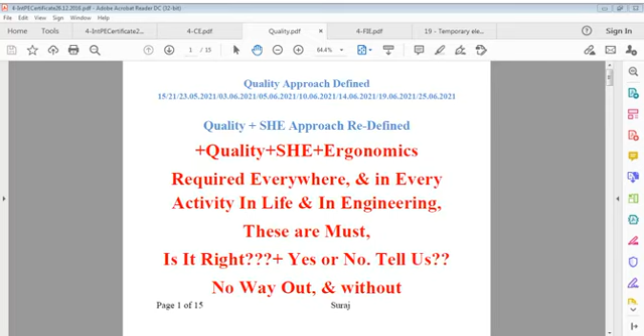The system should be that I paid you and you give me a good product. That is what the system is. But here the system has been changed to something else. Meaning delivery is more important, post is more important, courier is more important, the parcel is more important than what is contained in the parcel. That is the status of quality.

I can say this quality system is fake, in fact. Fake. You should mind it or don't mind it, I don't care. Quality system has become a burden on consumers if it cannot deliver a product. It is clearly stated in the system definition that this system does not guarantee quality of product. We know that. Don't tell us that the system doesn't guarantee that. We know it very well, it doesn't guarantee.

Because the system is not a manufacturer. System is not a company. System is just a few pieces of paper or a small booklet. It is nothing more than that. Certain ideas have been collected at one place in a few lines, in a few pages. Ideas of those professionals who may be engineers or management graduates, or who are only interested in creating a piece of show. If that is okay, up to that, it means they are just interested in a publicity stunt.

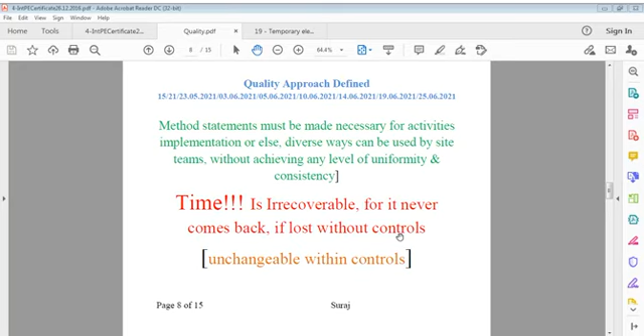requirements. I cannot produce a structure which is not going to be used, or which cannot be used just for elevation purpose. Should I do that? No. Fact remains that when I work on some structures, it remains meaningful only when it has a certain purpose. If it has no purpose, there is no meaning of investment of time, investment of money, investment, involvement, cost, risk, taking all risk. There is no meaning of that.

It's like some primary student or student of middle school takes up some drawing sheet and draws some art on that, some painting, which can be of no use except that I have done it. It looks very attractive, colorful, and teacher would grant some marks on that. That's purpose of that paint. But here I cannot paint. I have to do clear work. It's important. Painting will not suffice.

It's like makeup. If you think you're not very handsome or beautiful, you want to hide your errors, or you can say awkward faces, and you apply makeup on that. But that makeup is instant only, you spend only a couple of minutes or hours, and after that you wear it out.

Real face comes up, and real face comes up with further scratches or further stains on that. That real face is engineering, what you are, how you are. When you construct some structure, you find that it is not very beautiful in looking when you construct it.

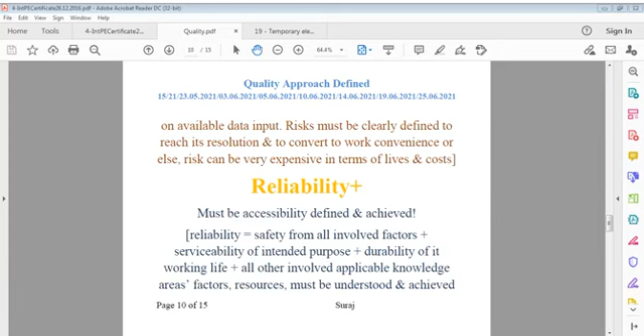This is main point, I would say, is very important from viewpoint of quality, because engineering is vast. Engineering is vast, and it may be whatever branch of engineering, all are vast. We must realize this fact also.

I'm not happy that why people are not interested in quality. I have no answer to that. How can you say that people are not interested? Everybody should be and must be interested in quality, but there may be some confinement, some obstruction to what is expected from viewpoint of quality, and those obstructions and those attractions, those problems maybe are out of control of that individual who is just an employee or manager or engineer in certain organization. Could be that that person is unable to help self, or there is some other reason that people do not bother.

You do not deliver quality does not mean that you did not spend money on that production, on that product manufacturing. Quality-less product could be, but cost remains same.

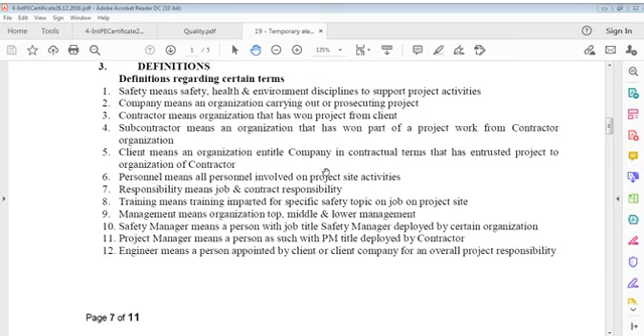When we talk of safety, we talk of a lot. This is temporary electrical supply. I talked a lot about this - I don't know how much we covered. We talked something about responsibility and that. So let us recap what I talked about - this very important point of electrical safety, because this is temporary electricals, which is also very very important.

And after that we can continue, because yesterday there was a problem of electrical supply, and also my internet did not work very well. Let us hope that it works today - I can't answer at this moment, but let us hope it would work.

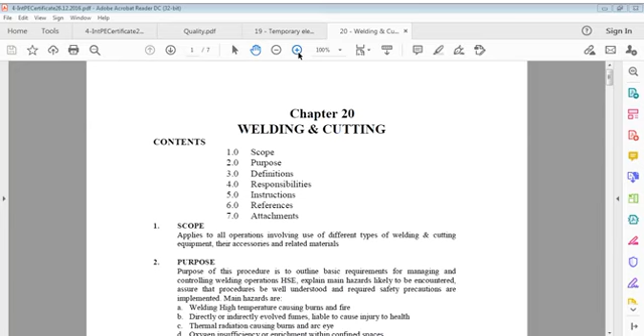In these procedures of safety, as I say, electrical supply - also there is electrical supply in welding and cutting. Let us see this also. Welding and cutting is about 7 pages. Let us move on to this and see how it's done. So we'll talk of this first.

Temporary, we have to get temporary supply for everybody on sites or wherever there is no permanent supply, on projects particularly. Generally in all projects, very limited sites get supply from state or from electrical distribution. If it's available, it's fine, you can have it. Otherwise, even if you take supply from them, that supply shall come to your main board, your transformer, or your main panel, and after that you are responsible. That main panel may be housed on a board, a temporary board, or maybe on some temporary wall.

After that, it's your job to use that electrical energy on your site work. On construction sites—I'm calling them construction sites because in factories lights are not temporary, and industries do not require temporary lights because they are established manufacturing units—we can't say that supply is temporary there, that's a permanent one. Temporary is for temporary work, like construction, which is a temporary stage. Whole constructions are temporary because projects are temporary until they are converted to operational units.

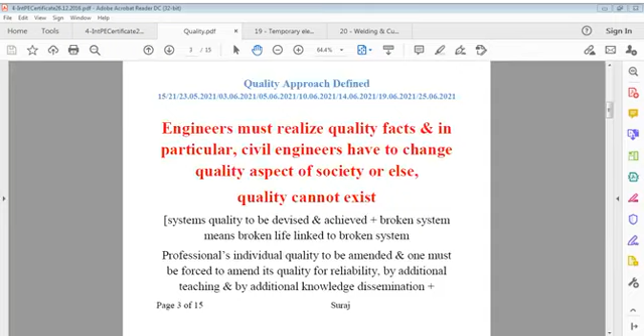So I say a regular site electrical management is required under direct controls of the electrical department on the project site. Electrical supplies to site for works is really a critical activity, since it cannot be provided in the style of permanent works. Routes of front work cable shall be required to be altered.

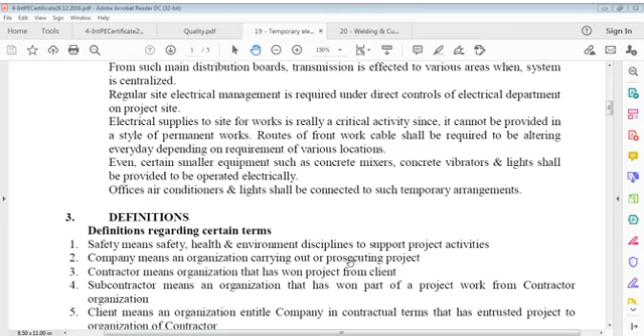Electrical supplies to site for works is really a critical activity since it cannot be provided in a style of permanent works. The routes of front work cable shall be required to be altered every day depending on requirements of various locations. Even certain smaller equipment such as concrete mixers, concrete vibrators and lights shall be operated electrically. Office air conditioners and lights shall be connected to such temporary arrangements.

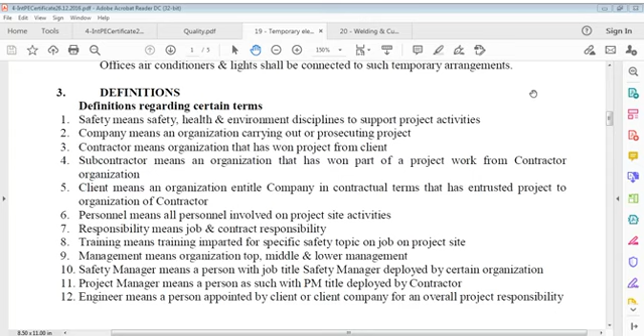Now we have certain definitions which sometimes I explain, sometimes not. This is safety - that's safety, health, and environment. Company - you know what is contractor, subcontractor, client, personnel means, and all that. Training means, of course, everyone - management, safety, all these are very common.

Employer, contractor, temporary electric is here - means temporary electric is all site temporary power supply and distribution systems, electric power tools, equipment and lighting not incorporated into permanent ones.

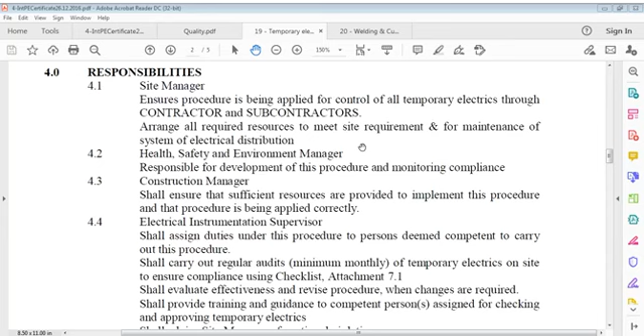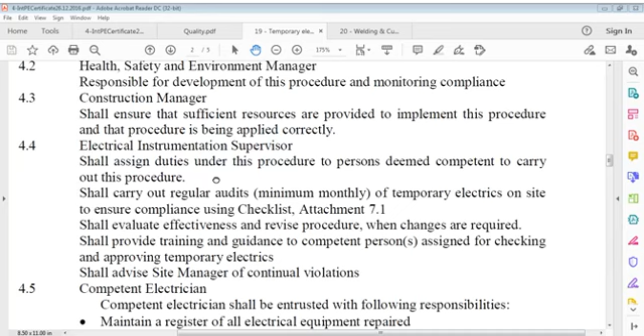Construction manager ensures that sufficient resources are provided to implement this procedure, and that the procedure is being applied correctly.

Electrical instrumentation supervisor assigns duties under procedure to persons deemed competent to carry out this procedure. Shall carry out regular audits, monthly minimum or more - maybe 15 days - of temporary electrics on site to ensure compliance using checklist or whatever attachment is there.

Shall evaluate effectiveness and revise procedure when changes are required - meaning if there is some requirement of change, you have to revise procedure - and provide training and guidance to competent persons assigned for checking and approving temporary electrics. Advise site manager or site leader of continual violations.

Competent electricians - what actually are electricians? Main technologists, you can say persons involved in running temporary electrical supply technology practically. Competent electrical person or electricians shall be entrusted with responsibilities.

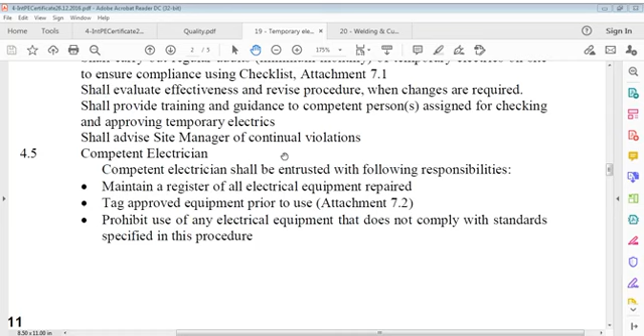What responsibilities? Maintain a register of all electrical equipment repaired. Tag approved equipment prior to use. Prohibit use of any electrical equipment that does not comply with standards specified in this procedure. Carry out random inspections of existing certified equipment to ensure that integrity of system is being maintained.

Means just act random, inspect. Though you can inspect everything, there's no bar, but in random, just for making sure it's running, system is running. Report back to E&I supervisor on certain concerns noted.

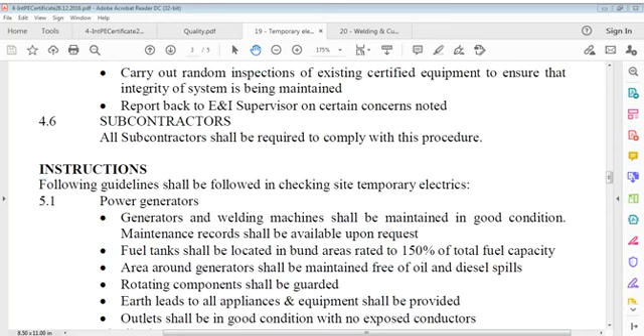Then subcontractor - all subcontractors shall be required to comply with this procedure. Very, very simple procedure, nothing very complicated in this procedure. Then instructions - instructions means guidelines. These given guidelines be followed in checking site temporary electricals, power generators, distribution.

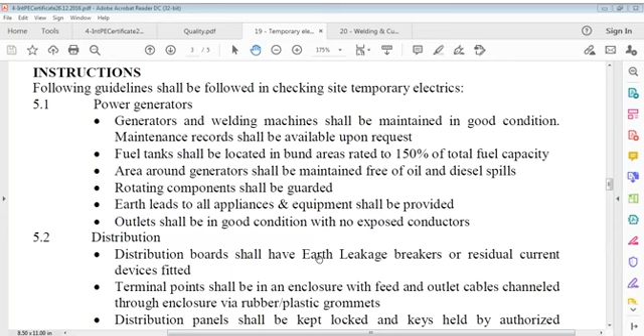This is power generators. Generators and welding machines shall be maintained in good condition. Maintenance records be available upon request. Fuel tanks shall be located in bund areas, means embankment areas, rated to 150% of total fuel capacity. Area around generators shall be maintained free of oil and diesel spills. Rotating components shall be guarded.

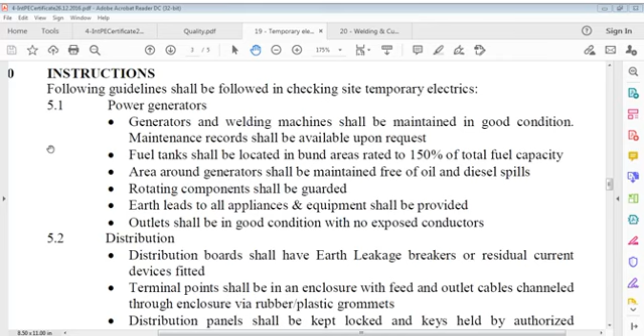Rotating components like grinder or electric saw or whatever else should have guards - call it shall be guarded. Earth leads to all appliances and equipment shall be provided - earth leads must. Outlets shall be in good condition with no exposed conductors.

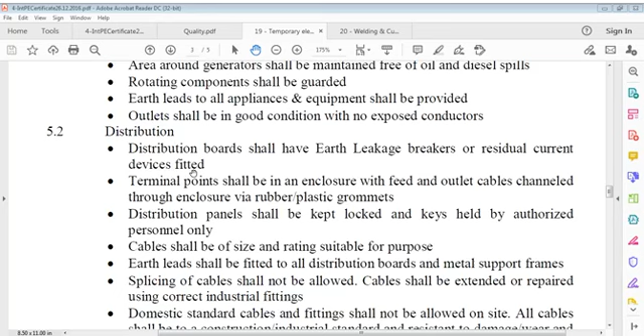Distribution - distribution boards shall have earth leakage breakers, ELCBs, or residual current devices fitted. Terminal points shall be in an enclosure with feed and outlet cables channeled through enclosure via rubber plastic grommets.

Distribution panels be kept locked and keys held by authorized personnel only. Cables shall be of size and rating suitable for purpose. Earth leads shall be fitted to all distribution boards and metal support frames.

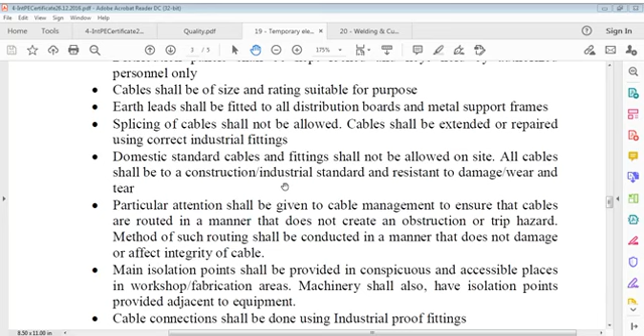Particular attention shall be given to cable management organization to ensure that cables are routed in a manner that does not create any obstruction or trip hazard. Method of such routing shall be conducted in a manner that does not damage or affect the integrity of the cable.

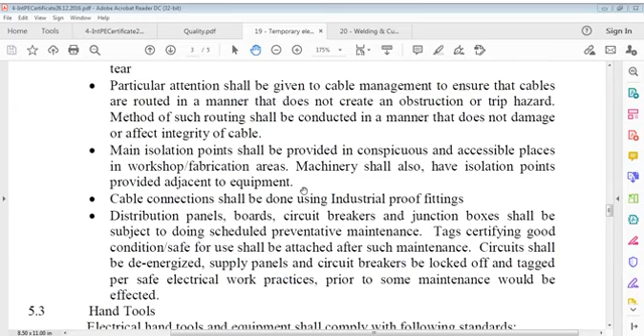Main isolation points shall be provided in conspicuous and accessible places in workshop and fabrication areas. Machinery shall also have isolation points provided adjacent to equipment.

Cable connections shall be done using industrial proof fittings. Distribution panels, boards, circuit breakers, and junction boxes shall be subject to scheduled preventive maintenance. Tags certifying good condition, safe for use, shall be attached after such maintenance. Circuits shall be de-energized, supply panels and circuit breakers locked off and tagged per safe electrical work practices prior to maintenance being effected.

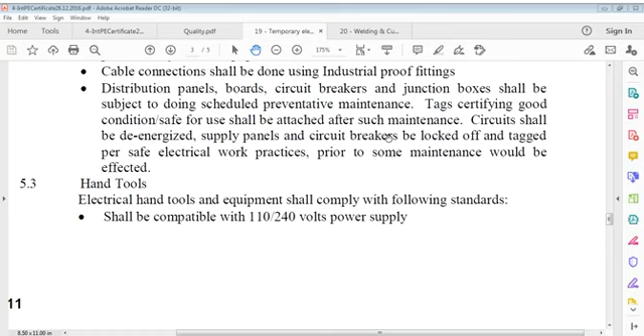Hand tools, electrical hand tools and equipment shall comply with the following standards: shall be compatible with 110 to 240 volts power supply. Should occasion arise where 240 volts requires to be used, such tools shall be double insulated. Equipment casing shall be intact, with no loose fittings or exposed cables. Plugs fitted shall be of an approved industrial type. Condition shall be good and the tool subject to preventive maintenance routines.

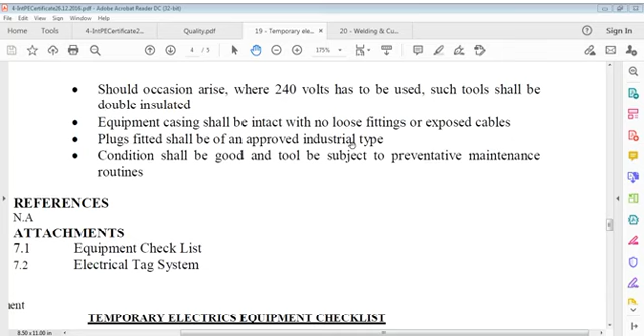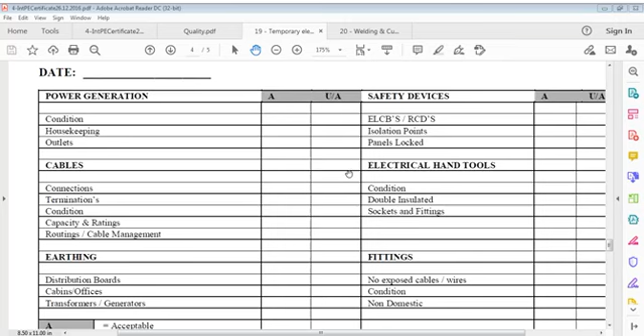Equipment checklist, electrical tag system - temporary electric equipment checklist. We have to write the area, and different conditions: power generation, housekeeping and outlets, safety devices like ELCBs, circuit breakers, RCDs, then cables, connections, terminations. These are various points - power generation, cables, earthing, electrical hand tools, fittings - few points that are better to understand.

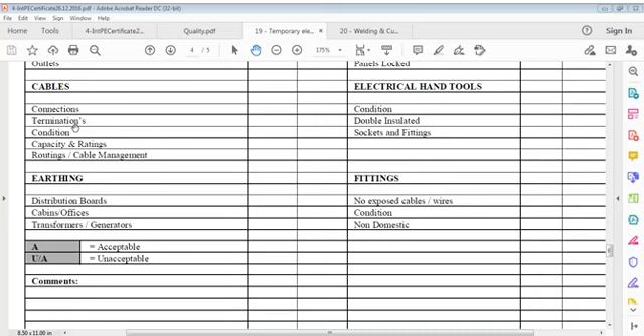In cables we have connections - important - cable connections, cable terminations, cable condition, cable capacity and ratings, cable routing, cable management. We have to check these and write them down. For power generation, we have to see condition, housekeeping, and outlets - what is the condition of power generation, what is the housekeeping, what about the outlets.

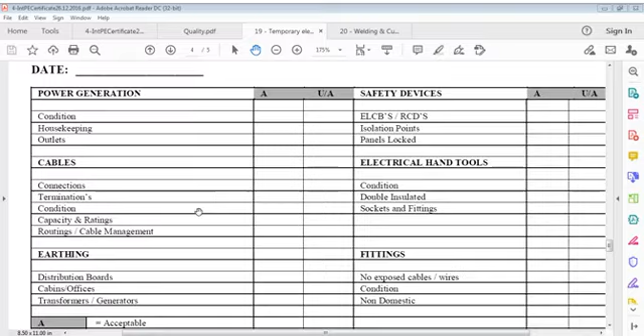Then we go to cables. Cable connections are required, cable terminations are required, what are the conditions there for cabling, capacity and rating of cable - that's more important - armored cable or whatever capacity it is, what's the rating, what's the route, that's organization, how to use it safely. Then earthing - distribution boards, connections, earthing, cabins and offices, transformers, generators. We mark A for acceptable, or UA for not acceptable.

This is like a survey - the temporary electric equipment checklist. For example, earthing is here. Then safety devices - ELCBs, RCDs, isolation points, and panel lock - these are devices we have to check. Then electrical hand tools - condition of the tool, double insulated sockets and fittings, etc.

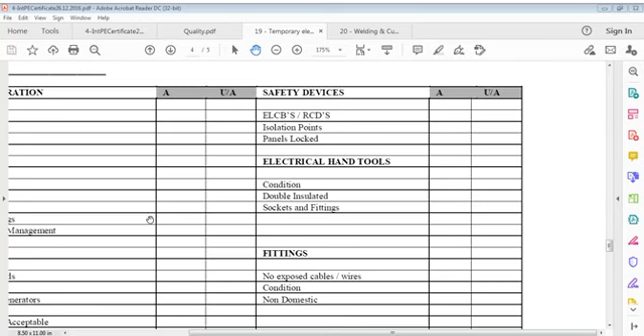So we mark A or UA - available, acceptable or unacceptable. Then fittings - no exposed cables or wires, condition non-domestic - and you have to do that practical, and equipment detail below has been checked and certified, and we write what the equipment is. Interference with this equipment shall negate this tag, and alterations required must be notified in advance to the undersigned.

That's an important point in the case of electrical supply. It's a very small page but very important one. And then we jump on.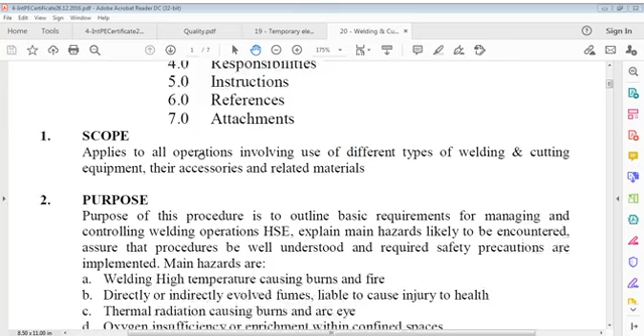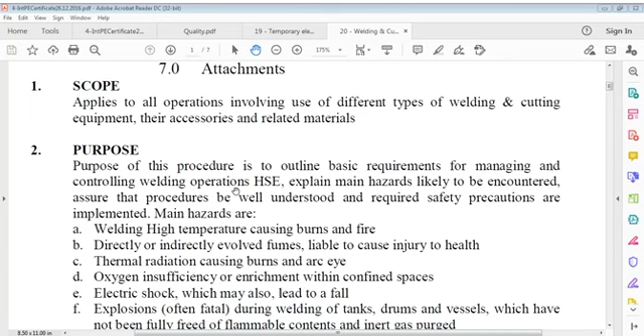Onto welding and cutting. Of course, welding and cutting, we go on to this and see how it works, and possibly if we can see electrical. Now, welding and cutting applies to all operations involving use of different types of welding and cutting equipment, accessories and related materials. And in this, what is their purpose, definitions, responsibilities, instructions. It's a very long one, almost simple.

So temporary electric supply I can just take off, and we'll go back to welding now. Let us see in addition, temporary electric supply, welding. Let us see what welding is about. Let us see. Let us see what welding is now. Let us understand what welding is.

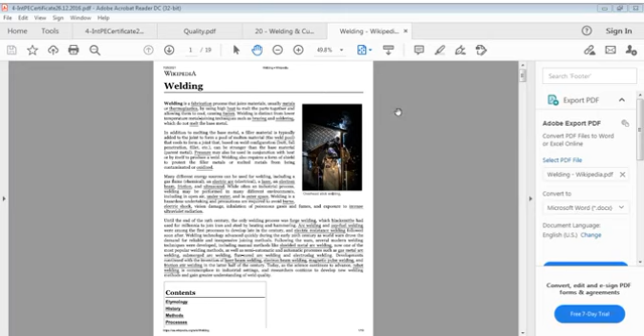Welding is a fabrication process. Let us see what it says. That's also important, I'll just take a printout of this to show you. I'm not going to save it because it's just... not coming up, I think. It says welding is a fabrication process. Okay, it has come. So I'll put that off first, but that's unnecessary. It keeps loading on this. Let's keep down that one and keep it up here. Let's go through this and see what it says. Okay, it's from Wikipedia.

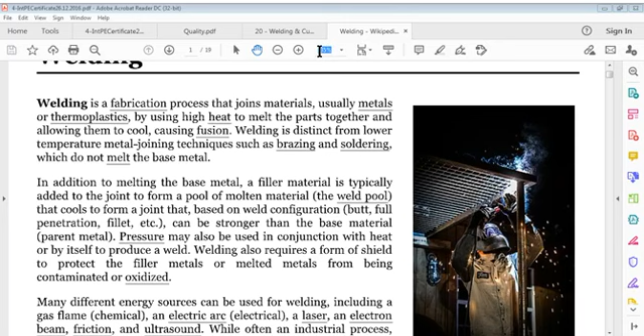Welding is a fabrication process that joins materials, usually metals or thermoplastics, both thermoplastics and metals, by using high heat to melt parts together and allowing them to cool, causing fusion. It's called fusion.

Welding is distinct from lower temperature metal joining techniques such as brazing and soldering, which do not melt base metal. In brazing and soldering, no melting is done. In addition to melting base metal, a filler material is typically added to form a pool of molten material, a weld pool, that cools to form a joint that, based on weld configuration—butt welding, full penetration, or fillet welding—can be stronger than the base material, the parent metal.

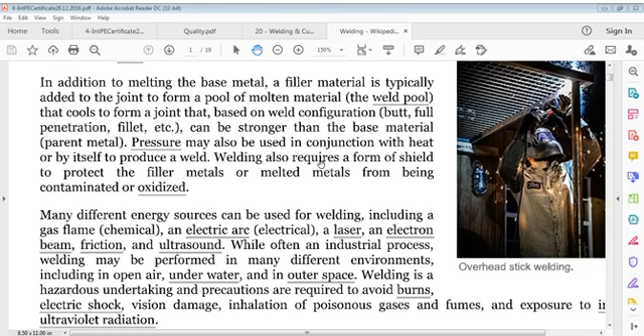I'll go further. Many different energy sources can be used for welding, including a gas flame, chemical, an electric arc, a laser, an electron beam, friction, and ultrasound. These are energy sources—you can just see this, very important one.

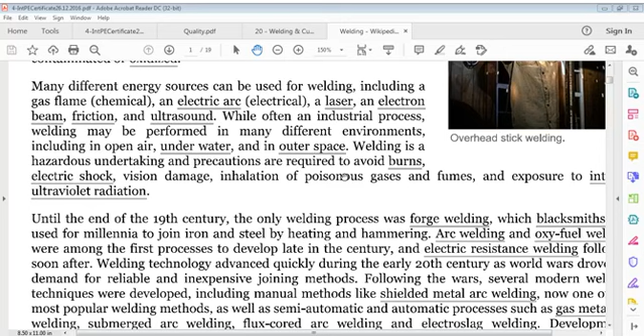While often an industrial process, welding may be performed in many different environments, including open air welding, underwater welding, and in outer space. Welding is a hazardous undertaking—hazardous, full of danger, unexpected danger—and precautions are required to avoid burns, electric shock, vision damage (eyes problems), inhalation (smell, taking smoke into your nose), inhalation of poisonous gases and fumes, and of course exposure to intense ultraviolet radiation.

Until the end of the 19th century, the only welding process was forge welding, which blacksmiths had used for millennia to join iron and steel by heating and hammering. Arc welding and oxy-fuel welding were among the first processes to develop late in the century, and electric resistance welding followed soon after.

Welding technology advanced quickly during the early 20th century as world wars drove demand for reliable and inexpensive joining methods.

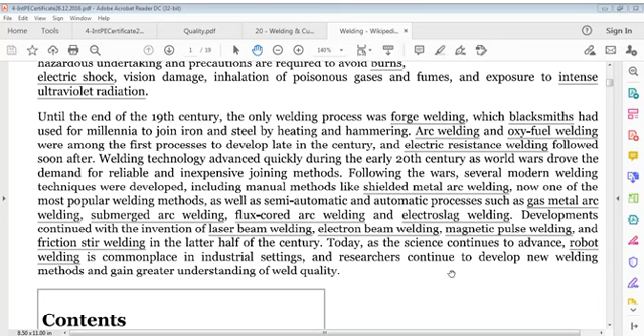Developments continued with the invention of laser beam welding, electron beam welding, magnetic pulse welding, and friction stir welding in the latter half of the century. Today, as science continues to advance, robot welding is commonplace in industrial settings, and researchers continue to develop new welding methods and gain greater understanding of weld quality.

What's the etymology of this?

The term weld is of English origin with roots from Scandinavia. It's often confused with the Old English word weald, meaning a forested area, but this word eventually morphed into the modern version, wild.

The Old English word for welding iron was samod, meaning to bring together, or samodwellung, to bring together hot with hot, more relating to red hot, or a swelling rage, samodwellung. This is in contrast to samodtengan, to bind together with rope or fasteners.

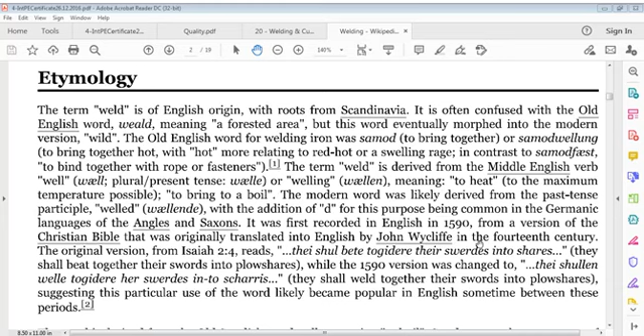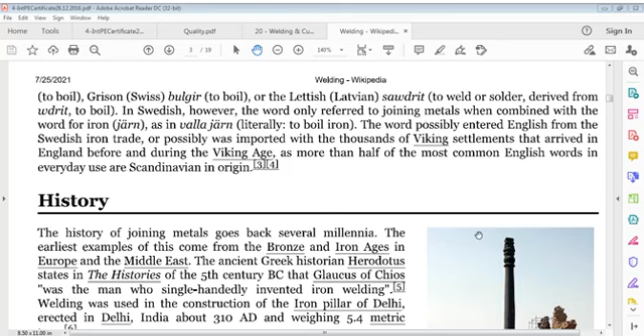Now, the history of joining metals goes back several millennia. The earliest examples of this come from the Bronze and Iron Ages in Europe and the Middle East. The ancient Greek historian Herodotus states in his Histories of the 5th century BC that Glaucus of Chios was the man who single-handedly invented iron welding.

Welding was used in the construction of the Iron Pillar of Delhi, erected in Delhi, India, about 310 AD, and weighing 5.4 metric tons. We call it iron. Here is iron, the Iron Pillar of Delhi, India. It is an iron pillar.

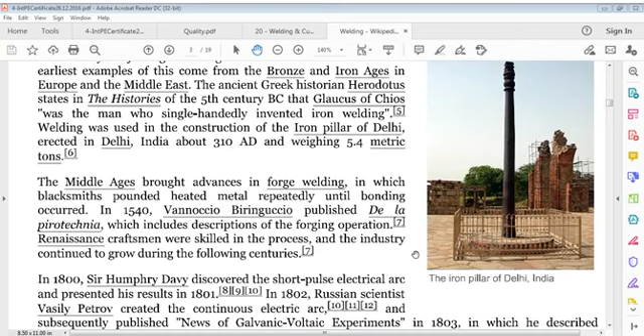The Middle Ages brought advances in forge welding, in which blacksmiths pounded heated metal repeatedly until bonding occurred. In 1540, Vannoccio Biringuccio published De la Pirotechnia, which includes descriptions of forging operations. Renaissance craftsmen were skilled in the process, and the industry continued to grow during the following centuries.

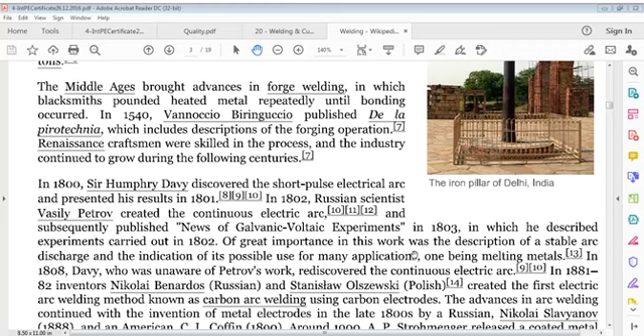This is all history. I'm just giving you an example. If you can read, you can go to it. I would like to see now resistance welding.

For example, resistance welding was also developed during the final decades of the 19th century, along with thermite welding and the like. Acetylene is very important - it was discovered in 1836 by Edmund Davy, but its use was not practical in welding until about 1900, when a suitable torch was developed.

At first, oxy-fuel welding was one of the more popular welding methods due to its portability and relatively low cost. As the 20th century progressed, however, it fell out of favor for industrial applications. It was largely replaced with arc welding, as advances in metal coverings known as flux were made. The flux covering on the electrode primarily shields the base material from impurities, but also stabilizes the arc and can add alloying components to the weld metal.

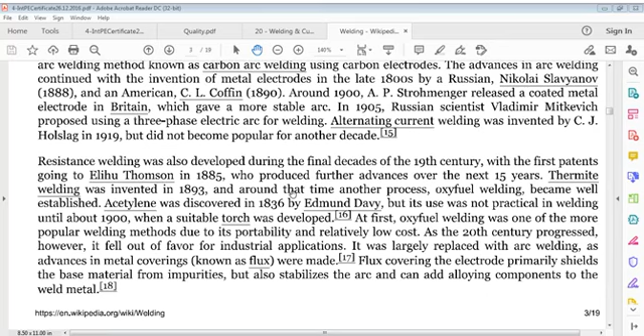World War I caused a major surge in the use of welding, with various military powers attempting to determine which of several new welding processes would be best. The British primarily used arc welding, even constructing a ship, the Fullagar, with an entirely welded hull. Arc welding was first applied to aircraft during the war as well, as some German airplane fuselages were constructed using the process. Also noteworthy is the first welded road bridge in the world, located in Poland.

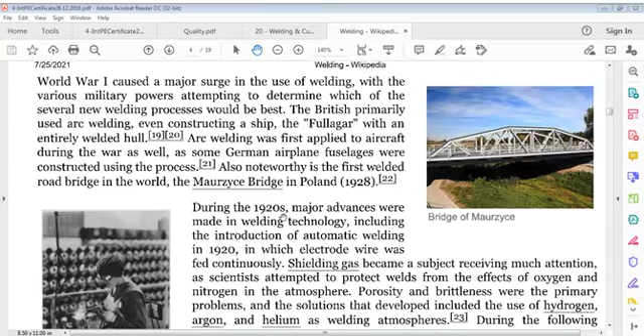During the 1920s, major advances were made in welding technology, including the introduction of automatic welding in 1920, in which electrode wire was fed continuously. Shielding gas became a subject receiving much attention, as scientists attempted to protect welds from the effects of oxygen and nitrogen in the atmosphere.

Shielding gas became a subject receiving much attention as scientists attempted to protect welds from effects of oxygen and nitrogen in the atmosphere. Porosity and brittleness were primary problems, and solutions that developed included use of hydrogen, argon and helium as welding atmospheres.

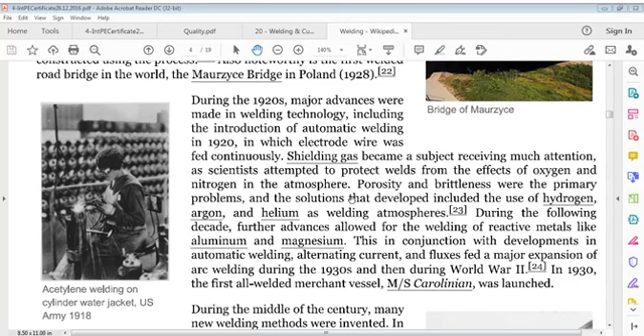During the following decade, further advances allowed for welding of reactive metals like aluminum and magnesium. This, in conjunction with developments in automatic welding, alternating current and fluxes, fed a major expansion of arc welding during the 30s and then during World War.

So this is all you can read, it means a lot. Just for information, I try to.

Now let's go to what is process. That's important. Processing, it's a very important part.

Now, arc. What is arc actually? Power supplies, and then what is arc? These processes used as welding power supply to create and maintain an electric arc between an electrode and base material to melt metals at the welding point. This means this is a process that creates an arc, or to maintain an electric arc between an electrode and base materials to melt metals at welding point.

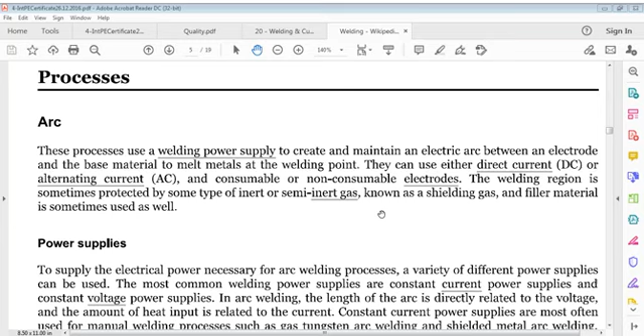They can use either direct current or alternating current, and consumable and non-consumable electrodes. Welding region is sometimes protected by some type of inert or semi-inert gas known as a shielding gas, and filler material is sometimes used as well.

Power supplies, to supply electrical power necessary for our welding process, a variety of different power supplies can be used. Most common welding power supplies are constant current power supplies and constant voltage power supplies. In arc welding, length of arc is directly related to voltage, and amount of heat input is related to current.

This means length of arc is related to voltage, and amount of heat input is related to current. Constant current power supplies are most often used for manual welding processes such as gas tungsten arc welding and shielded metal arc welding, because they maintain a relatively constant current even as voltage varies. This is important because in manual welding it can be difficult to hold the electrode perfectly steady, and as a result arc length and thus voltage tend to fluctuate.

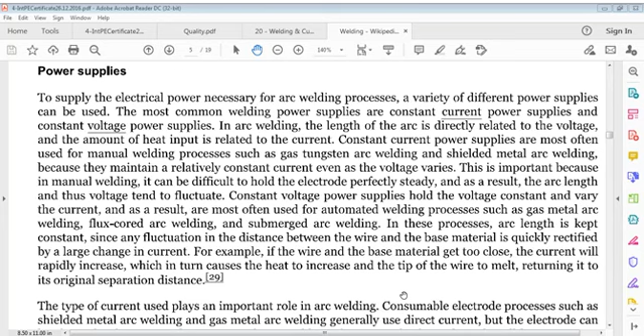let us say constant current power supplies are most often used for manual welding processes such as gas tungsten arc welding and shielded metal arc welding, because they maintain a relatively constant current even as voltage varies. This is important because in manual welding it can be difficult to hold the electrode perfectly steady, and as a result arc length and thus voltage tend to fluctuate.

Constant voltage power supplies hold voltage constant and vary current. As a result, they are most often used for automated welding processes such as gas metal arc welding, flux core arc welding, and submerged arc welding. In these processes, arc length is kept constant since any fluctuation in distance between wire and base material is quickly rectified by a large change in current. For example, if wire and base material get too close, current shall rapidly increase, which in turn causes heat to increase and tip of wire to melt, returning it to its original separation distance.

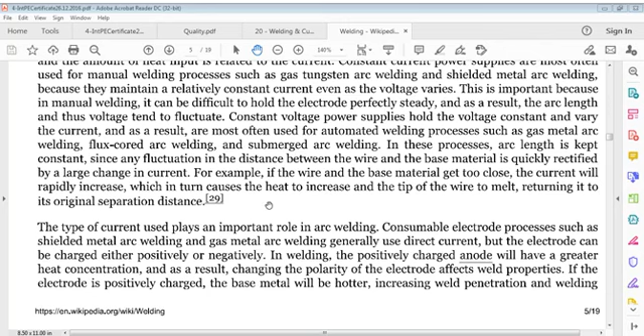If electrode is positively charged, base metal will be hotter, increasing weld penetration and welding speed. Alternatively, a negatively charged electrode results in more shallow welds.

Non-consumable electrode processes such as gas tungsten arc welding can use either type of direct current as well as alternating current. However, with direct current, because the electrode only creates the arc and does not provide filler material, a positively charged electrode causes shallow welds, while a negatively charged electrode makes deeper welds. Alternating current rapidly moves between these two, resulting in medium penetration welds.

One disadvantage of AC is the fact that the arc must be reignited after every zero crossing. This has been addressed with the invention of special power units that produce a square wave pattern instead of a normal sine wave, making rapid zero crossings possible and minimizing the effects of the problem.

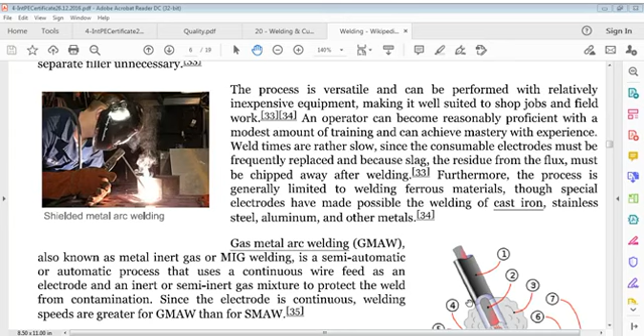Furthermore, the process is generally limited to welding ferrous materials, though special electrodes have made possible welding of cast iron, stainless steel, aluminum, and other metals.

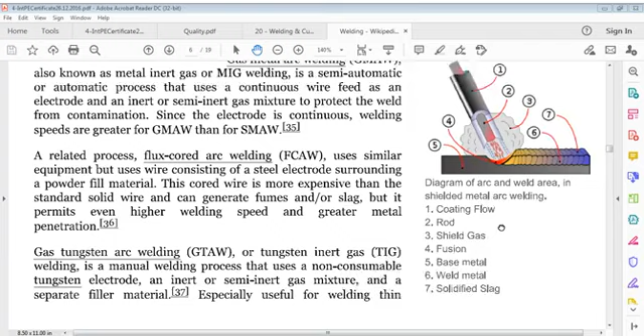Gas metal arc welding. Before that, you can see this diagram, which is the arc and weld area in shielded metal arc welding. You can see terms numbered 1 through 7.

One is coating flow. Two is rod. Three is shield gas, and four is fusion, and five is base metal, and six is weld metal, and seven is solidified slag.

Gas metal arc welding, also known as metal inert gas or MIG welding, is a semi-automatic or automatic process that uses a continuous wire feed as an electrode and an inert or semi-inert gas mixture to protect the weld from contamination. Since the electrode is continuous, welding speeds are greater for GMAW than for SMAW.

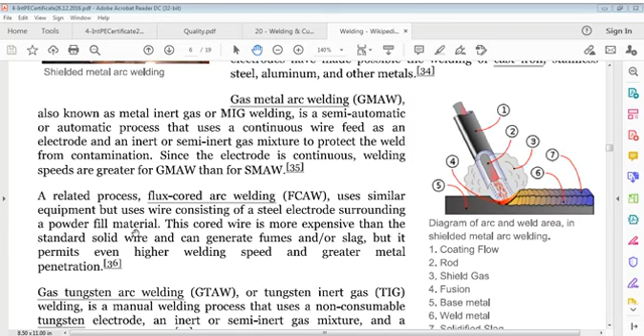Gas tungsten arc welding, or tungsten inert gas.

Flux core arc welding uses similar equipment but uses wire consisting of a steel electrode surrounding a powder fill material. This core wire is more expensive than standard solid wire and can generate fumes or slag, but permits even higher welding speed and greater metal penetration.

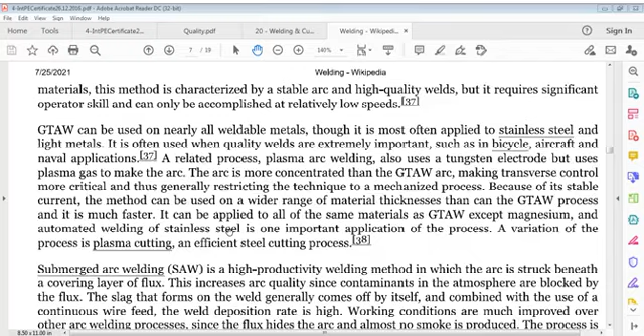GTAW can be used on nearly all weldable metals, though it's most often applied to stainless steel. It can be applied to stainless steel and light metals. It is often used when quality welds are extremely important, such as in bicycle, aircraft, and naval applications.

A related process, plasma arc welding, also uses a tungsten electrode but uses plasma gas to make the arc. The arc is more concentrated than the GTAW arc, making transverse control more critical.

A related process, plasma arc welding, also uses a tungsten electrode but uses plasma gas to make the arc. The arc is more concentrated than the GTAW arc, making transverse control more critical and thus generally restricting the technique to a mechanized process. Because of its stable current, the method can be used on a wider range of material thicknesses than can GTAW.

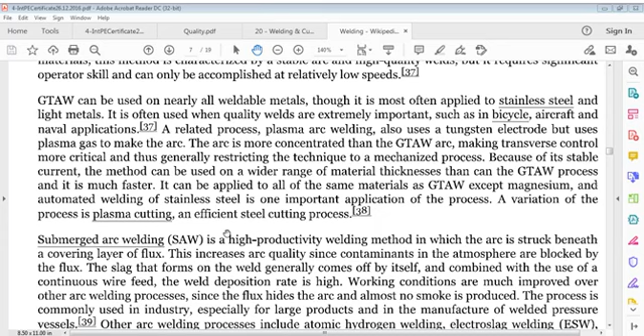Submerged arc welding is a high productivity welding method in which the arc is struck beneath a covering layer of flux.

This increases arc quality since contaminants in the atmosphere are blocked by the flux.

Slag that forms on the weld generally comes off by itself, and combined with use of a continuous wire feed, the weld deposition rate is high. Working conditions are much improved over other arc welding processes. Since flux hides the arc and almost no smoke is produced, the process is commonly used in industry, especially for large products and in the manufacture of welded pressure vessels.

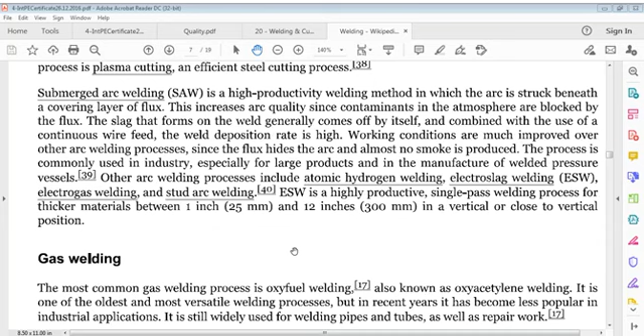Other arc welding processes include atomic hydrogen welding, electro slag welding, electro gas welding, and stud arc welding. Electro slag welding (ESW) is a highly productive single pass welding process for thicker materials between 1 inch or 25 mm to 300 mm, in a vertical or close to vertical position.

Gas welding: the most common gas welding process is oxy-fuel welding, also known as oxyacetylene welding. It's one of the oldest and most versatile welding processes, but in recent years it has become less popular in industrial applications. It is still widely used for welding pipes and tubes, as well as repair work.

The equipment is relatively inexpensive and simple, generally employing combustion of acetylene in oxygen to produce a welding flame, at a temperature of about 3100 degrees Celsius.

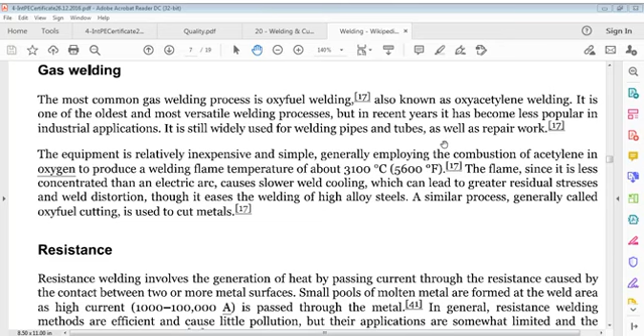The flame, since it's less concentrated than an electric arc, causes slower weld cooling, which can lead to greater residual stresses and weld distortion, though it eases welding of high alloy steels. A similar process, generally called oxy-fuel cutting, is used to cut metals. Resistance...

Resistance welding involves generation of heat by passing current through resistance caused by contact between two or more metal surfaces. Small pools of molten metal are formed at the weld area as high current, 1000 to 100,000 amperes, is passed through the metal. In general, resistance welding methods are efficient and cause little pollution, but applications are somewhat limited and equipment cost can be high.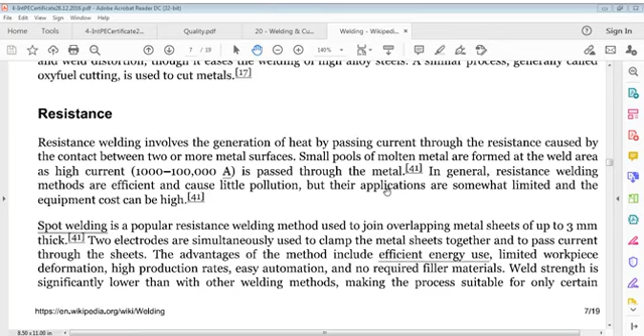making the process suitable for only certain applications. It's used extensively in the automotive industry. Ordinary cars can have several thousand spots.

Seam welding relies on two electrodes to apply pressure and current to join metal sheets. However, instead of pointed electrodes, wheel shaped electrodes roll along and feed the workpiece, making it possible to make long continuous welds.

In the past, this process was used in the manufacture of beverage cans, but now its use is more limited. Other resistance welding methods include butt welding, flash welding, projection welding, and upset welding.

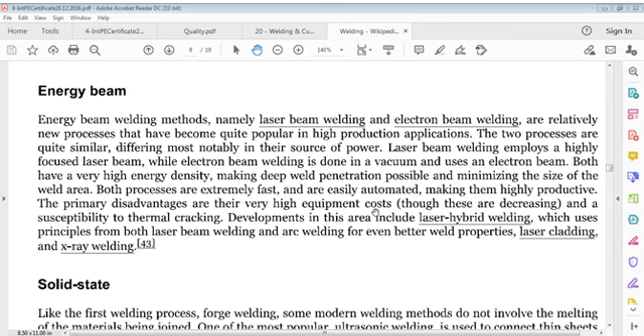Solid state. Like the first welding process, forge welding, some modern welding methods do not involve melting of the materials being joined.

One of the most popular, ultrasonic welding, is used to connect thin sheets or wires made of metal or thermoplastics by vibrating them at high frequency and under high pressure.

Equipment and methods involved are similar to those of resistance welding, but instead of electric current, vibration provides the energy input. When welding metals, this process does not involve melting materials. Instead, the weld is formed by introducing mechanical vibrations horizontally under pressure. When welding plastics, materials should have similar melting temperatures and vibrations are introduced vertically.

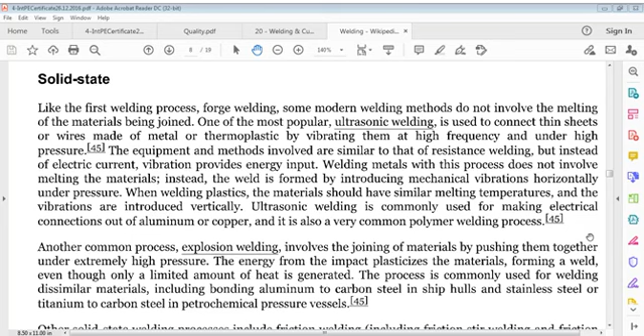Another common process is explosion welding. Explosion welding involves joining of materials by pushing them together under extremely high pressure. Energy from the impact plasticizes

Materials forming a weld. Even though only a limited amount of heat is generated, this process is commonly used for welding dissimilar materials.

Including bonding aluminum to carbon steel in ship hulls, and stainless steel or titanium to carbon steel in petrochemical pressure vessels.

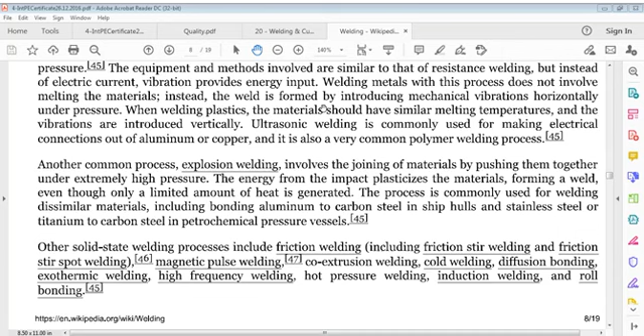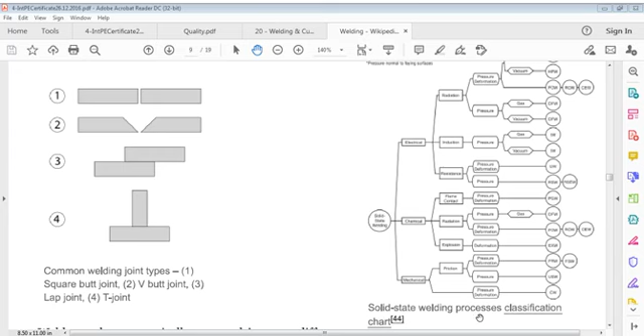Now geometry. Common welding joint types: one is square butt joint, two is V butt joint, three is lap joint, and four is T joint. The solid state welding process classification we'll see later, since the sketch isn't clear here.

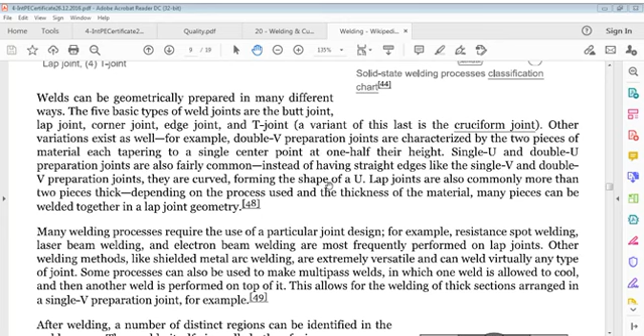Welds can be geometrically prepared in many different ways. The 5 basic types of weld joints are butt joint, corner joint, lap joint, edge joint, and T joint. A variant of the T joint is the cruciform joint. Other variations exist as well.

For example, double V preparation joints are characterized by two pieces of material each tapering to a single center point at half their height. Single U and double U preparation joints are also fairly common. Instead of having straight edges like single V and double V preparation joints, they are curved, forming the shape of a U. Lap joints are also commonly more than two pieces thick, depending on the process used and the thickness of material. Many pieces can be welded together in a lap joint geometry.

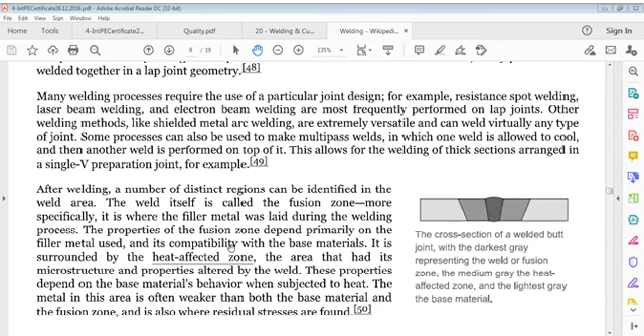There is a cross section of a welded butt joint, with the darkest grey representing the weld or fusion zone, medium grey the heat affected zone, and the lightest grey the base material. After welding, a number of distinct regions can be identified in the weld area. The weld itself is called the fusion zone. More specifically, it's where filler material was laid during the welding process.

Properties of the fusion zone depend primarily on the filler metal used and its compatibility with the base materials. It's surrounded by the heat affected zone, an area that has its microstructure and properties altered by the weld. These properties depend on the base material's behavior when subject to heat. Metal in this area is often weaker than both the base material and the fusion zone.

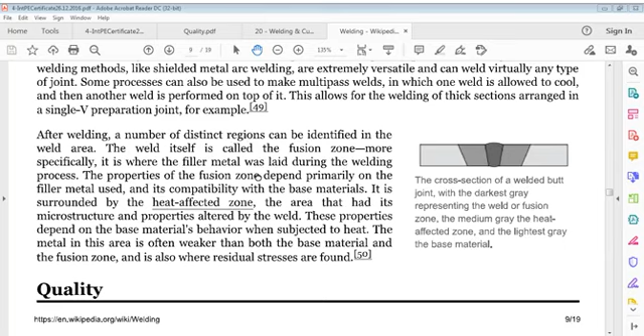Quality: many distinct factors influence the strength of welds and the material around them, including welding method, amount and concentration of energy input, weldability of base material, filler material, and flux material, design of joint, and interactions between all these factors.

To test the quality of a weld, either destructive or non-destructive testing methods are commonly used to verify that welds are free of defects, have an acceptable level of residual stresses and distortion, and have an acceptable heat affected zone. Types of welding defects include cracks, distortion, gas inclusions or porosity, non-metallic inclusions, lack of fusion, and incomplete penetration.

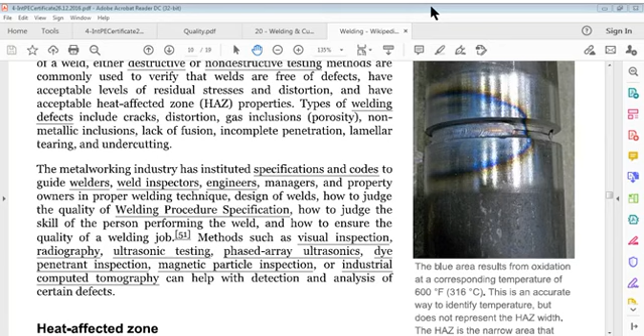The metalworking industry has established how to judge the skill of a person performing a weld and how to ensure quality of a welding job. Methods such as visual inspection, radiography, ultrasonic testing, phased array ultrasonics, dye penetrant inspection, magnetic particle inspection, or industrial computed tomography can help with detection and analysis of certain defects.

Heat affected zone, or HAZ, is a ring surrounding the weld in which the temperature of the welding process combined with stresses of uneven heating and cooling alters heat treatment properties of the alloy. Effects of welding on material surrounding the weld can be detrimental depending on materials used and heat input of the welding process used. The heat affected zone can be of varying size and strength.

Thermal diffusivity of the base material plays a large role. If diffusivity is high, material cooling rate is high and HAZ is relatively small. Conversely, low diffusivity leads to slower cooling and a large HAZ. Amount of heat injected by the welding process plays an important role as well, as processes like oxyacetylene welding have an unconcentrated heat input and increase the size of HAZ.

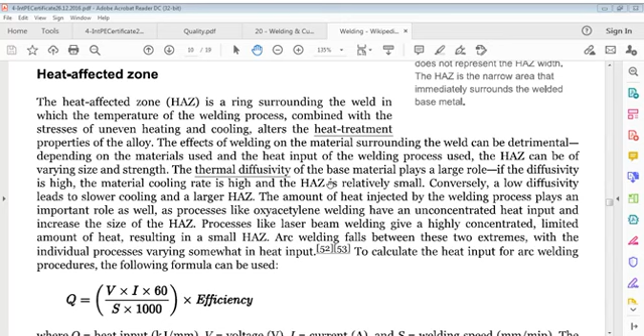To calculate heat input for an arc welding procedure, the following formula can be used: Q equals heat input in kilojoules per mm, V is voltage, I is current, and S is welding speed in mm per minute. Q equals V times I times 60, where V is voltage, I is current, and 60 converts to minutes, divided by S, the welding speed in mm per minute, times 1000, times efficiency.

Efficiency is dependent on the welding process used, with shielded metal arc welding having a value of 0.75, gas metal arc welding and submerged arc welding 0.9, and gas tungsten arc welding 0.8.

Methods of alleviating stresses and brittleness created in the HAZ include stress relieving and tempering. We will take up the remaining part later on, this part is interesting, we'll cover it later.

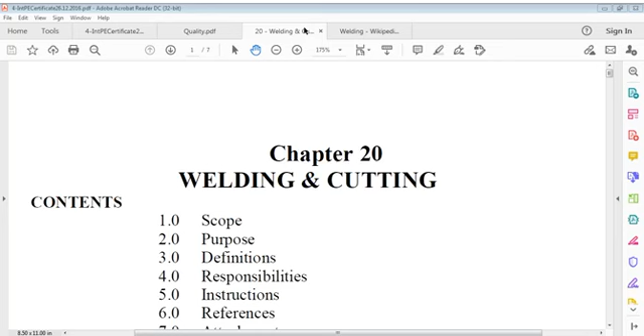Just a minute, let me show you what we have actually discussed today. We covered welding quality input, and that's our background on welding today.